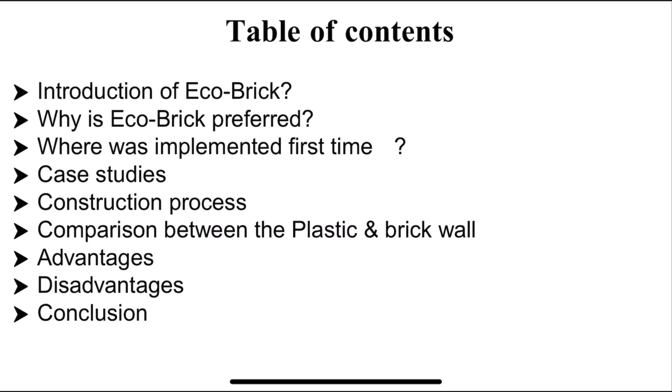Table of contents. In this presentation, we will get information about the introduction of eco-bricks, why eco-bricks, where it was implemented first, case studies, etc. First, what is an eco-brick? We have three main points here. First, an eco-brick is a simple way to take personal responsibility for plastic, to keep it out of industry and out of the biosphere.

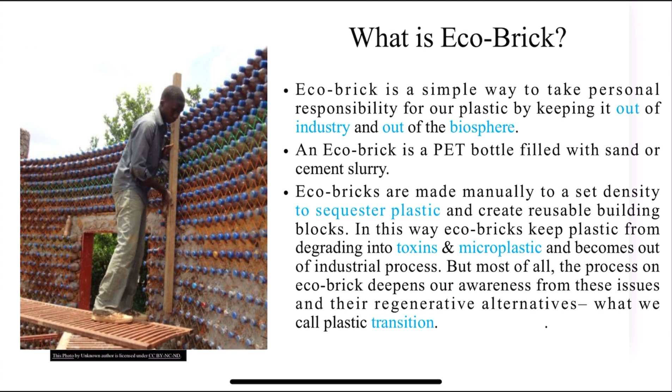Second, an eco-brick is a PET bottle filled with sand or cement slurry. Third, eco-bricks are made manually to a set density to sequester plastic and create reusable building blocks. In this way, eco-bricks keep plastic from degrading into toxins and microplastics and keep it out of industrial processes. But most of all, the eco-brick process deepens our awareness of this issue and its regenerative alternatives, what we call plastic transition. This project was implemented for the first time in Nigeria, 20 kilometers away from the capital Abuja.

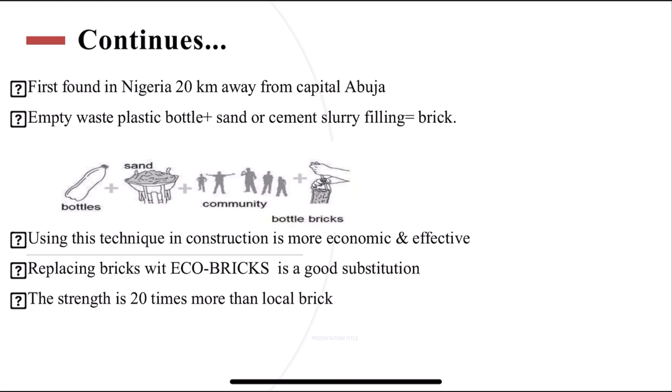What is the mechanism? How do we produce eco-bricks from PET bottles? We take empty waste plastic bottles, then we fill them with sand or cement slurry. It gives us eco-bricks. Using this technique in construction is more economical and effective, and replacing bricks with eco-bricks is a good substitution in our construction. And the strength is 20 times more than local brick.

Why eco-bricks? We have some points, mentioned one by one. First, repurposing used PET bottles into useful building materials. Second, well insulated. Third, sturdy, meaning more rigid; cheaper, easy to build, a great way to solve homelessness in economically backward countries.

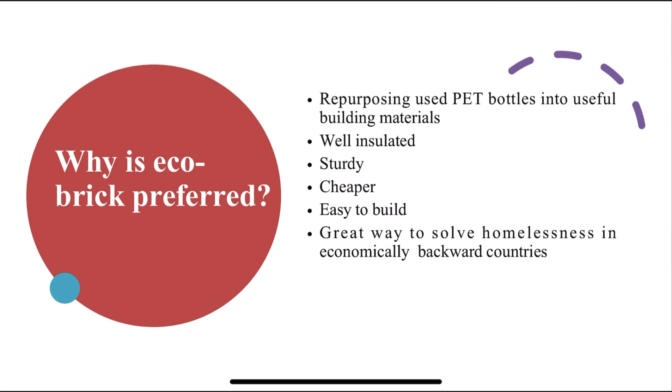Where was it implemented first? This project was constructed in the following four countries: first, Nigeria; second, Central America; third, India; and fourth, the Philippines.

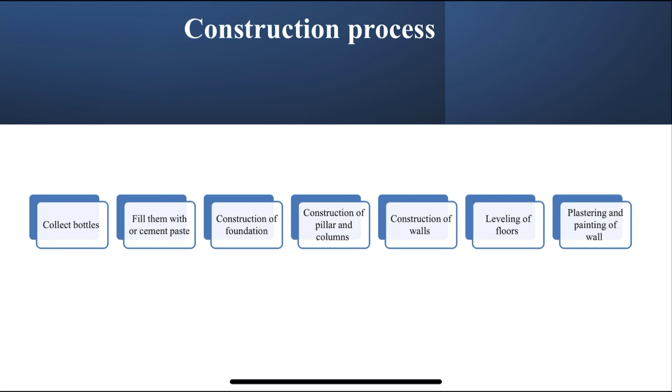Next, construction process. First, we collect bottles, then fill them with cement or sand slurry, then construct the foundation of the house, construct pillars and columns, construct walls, level the floors, and plaster and paint the walls of the house.

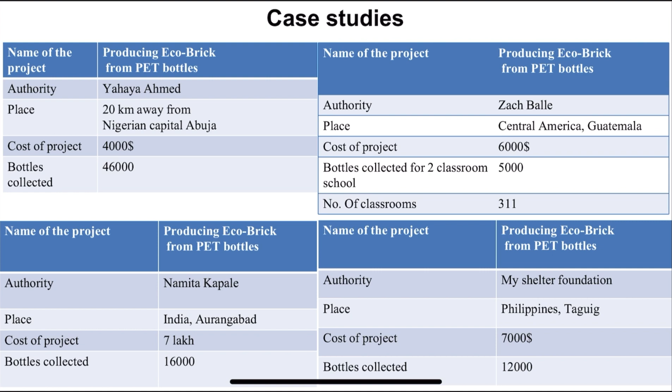Case study. This is the information about the four projects in four countries. As I mentioned the countries in the previous slide, I want to give you information about one project, and the rest are left to you to take a look at. The first project was constructed in Nigeria. The engineer was Yahaya Ahmed, the cost of the project was $4,000, and 46,000 PET bottles were collected and used as eco-bricks in that house construction.

We are coming to the construction process, and all the steps will be mentioned one by one. First step, collecting bottles. While collecting plastic bottles, there will be different capacities and thicknesses, so we need to collect them according to their capacities. Second step, filling with cement paste or sand. In the filling process, we can use sand paste, cement paste, mud slurry, plastic papers, and plastic waste.

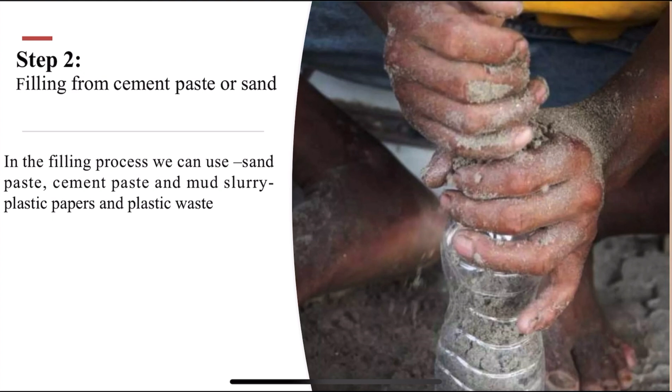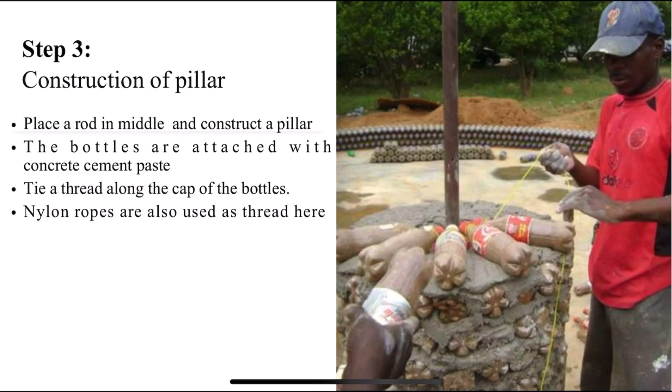Third step, construction of a pillar. We have some points here. First, place a rod in the middle and construct the pillar. Second, the bottles are attached with concrete cement paste. Third, tie a thread along the caps of the bottles. Fourth, nylon ropes are also used as thread here.

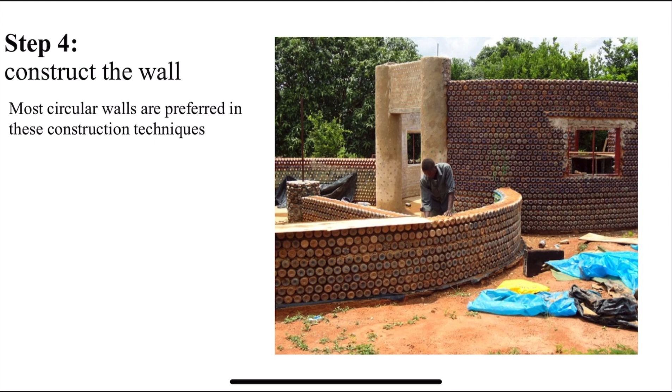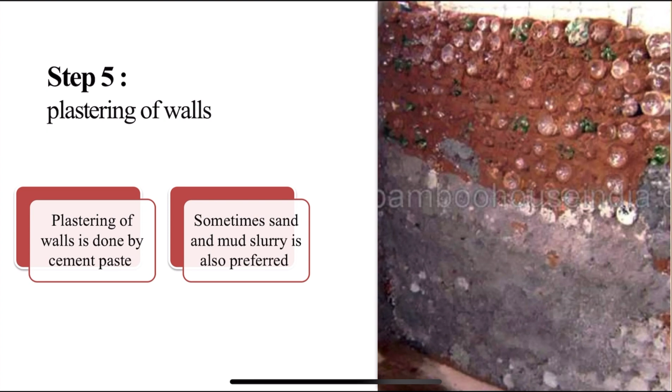Fourth step, construct the wall. Mostly circular walls are preferred in this construction technique. As you are seeing in the photo, we need to construct circular walls. These circular walls are more effective for the projects. Fifth step, plastering of walls. Plastering of walls is done with cement paste. Sometimes sand and mud slurry is also preferred, as you are seeing in the photo.

Comparison between plastic wall and brick wall. First, time of execution is 15% faster, but for a brick wall, more time is required. Next, saving in cement, water, and grinder and filling, but a brick wall has more weight and more materials. Next, lighter and higher volume, easy and cheap displacement, but a brick wall has greater weight, less volume, and hard and costly displacement.

Next, the strength of an eco-brick is 20 times more than local brick. But with local brick, if we have greater wall thickness, we will have lower strength. An eco-brick has less cost, but a local brick has more cost. The compressive load of an eco-brick is 30 kN/mm², but the compressive load of a local brick is 10.35 kN/mm². The weight of an eco-brick is 1.2 kg, but the weight of a local brick is 3.5 kg.

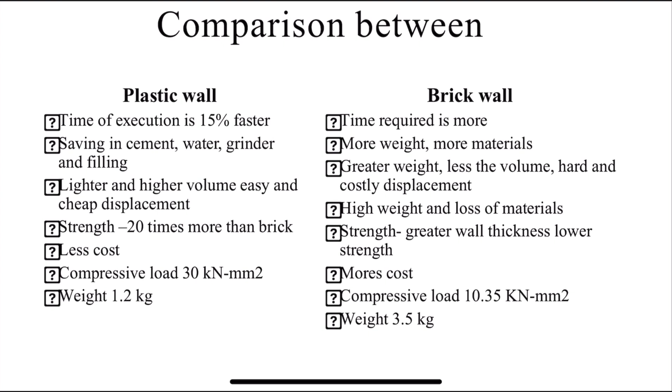Now we are coming to the advantages and disadvantages of eco-bricks, one by one. First, reducing environmental pollution. Next, it avoids transport of waste, as the purpose is to collect local garbage. It takes cubic meters of plastic into construction and keeps it from ending up in dumping sites, rivers, or seas. It provides new livelihood activities for people working at dumping sites and opportunities for construction companies, etc.

Now we are coming to the disadvantages of eco-bricks. The construction is temporary, as it is ongoing research. The compressive strength and tensile strength, which determine the strength of construction, are not determined. Providing plumbing and electricity lines is still not clear. The threatening disadvantage is pollution: if this technology is adopted worldwide, there is a risk of increased plastic production.

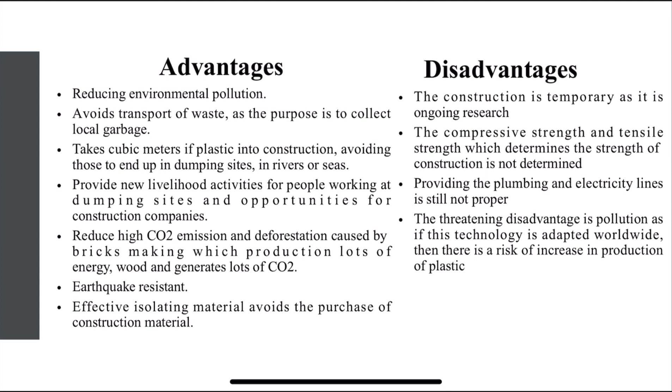Conclusion. At the end of this presentation, I want to mention two main points about this project and about eco-bricks. The first one, using plastic bottles instead of bricks will help reduce contamination and the cost of construction. Second, it is a good opportunity for poor people to have cheap houses. Furthermore, bottle houses are bioclimatic in design, which means that when it is cold outside, it is warm inside, and vice versa.